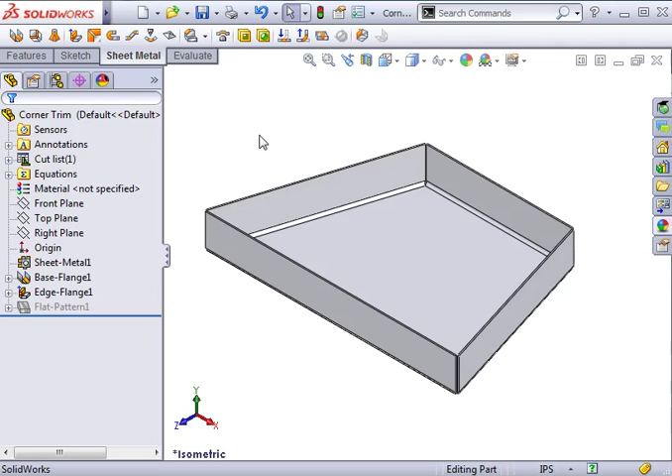Another tool you should be aware of when working with the flat pattern of a sheet metal part is the corner trim feature, which allows you to add relief and break any sharp edges. Corner trim can be launched from the sheet metal toolbar or from the Insert Sheet Metal drop-down menu. Right now, the command is grayed out.

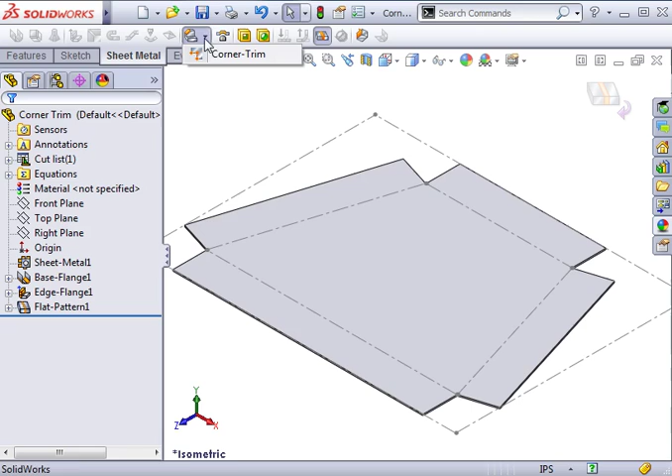The reason for this is that the new feature will be dependent on the flat pattern feature, meaning it will only be active in the flattened state. I'll go ahead and flatten the part. As soon as I do, the corner trim feature becomes available. I'll click on it, and the corner trim property manager will appear.

To get started, I can click on each edge that I wish to add relief to. Or I can use the Collect All Corners button to have SOLIDWORKS select all of them for me. Using the relief pull-down, I can set it to use square or bend waist, or I can leave it as circular. Whatever option I decide, I'll also be able to adjust the size using this area, or by using the ratio to thickness option.

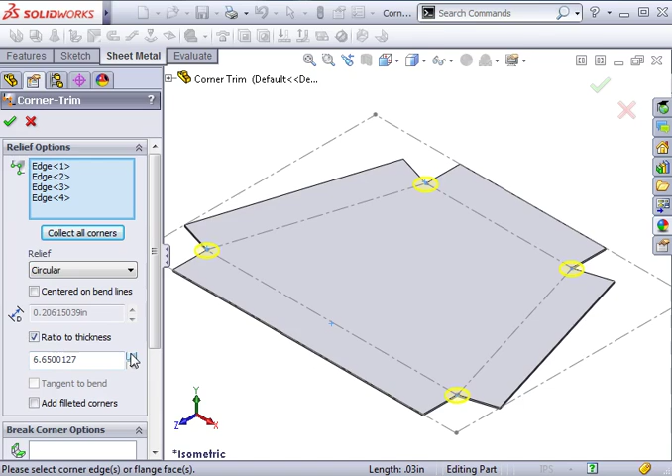When using the circular or square type, I can use the Centered on Bend Lines option to have SOLIDWORKS center the relief cuts relative to the bend lines. If I use the square type with the Centered on Bend Lines option, I also have the Tangent to Bend option, which automatically sizes the cut so that it's tangent to the bend lines. I can add fillets to the corners of the reliefs by checking this option and adjusting the radius.

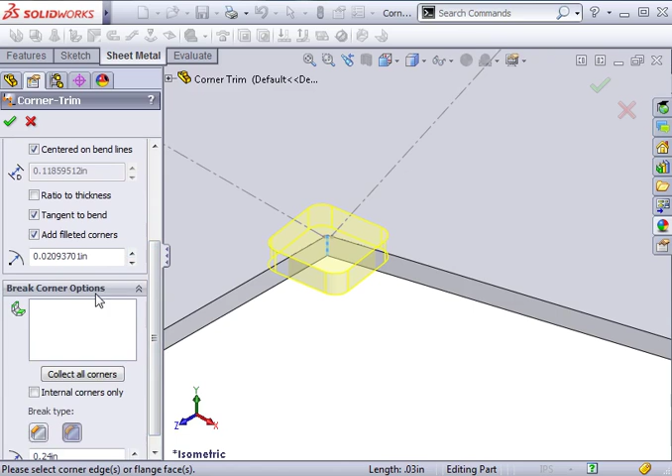The other section in the Property Manager I can adjust is the Break Corner options. This option allows you to remove material from external edges and add material to internal edges. To break all of the sharp edges, I'll click on the face of the sheet metal, and SOLIDWORKS will break every sharp edge that's touching the face. Notice the Break option does not override the edges that were added in the Relief Options section.

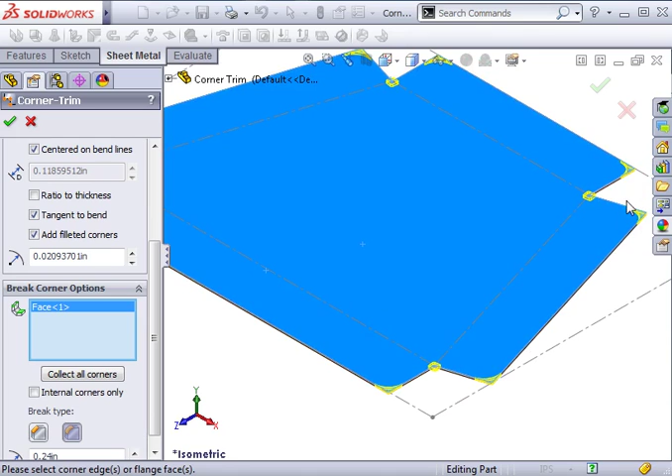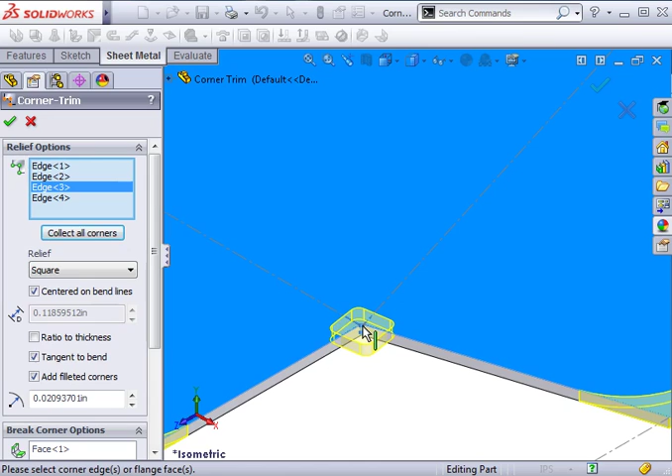If I wanted to break one of these edges instead of adding relief, I must remove it from the Relief Options section by right-clicking on it in the Property Manager and choosing Delete, or by clicking on it again in the Graphics window. You can see by the preview that SOLIDWORKS is adding a chamfered break to the edges, and I can adjust the size of the chamfer or change this to fillet and adjust the radius.

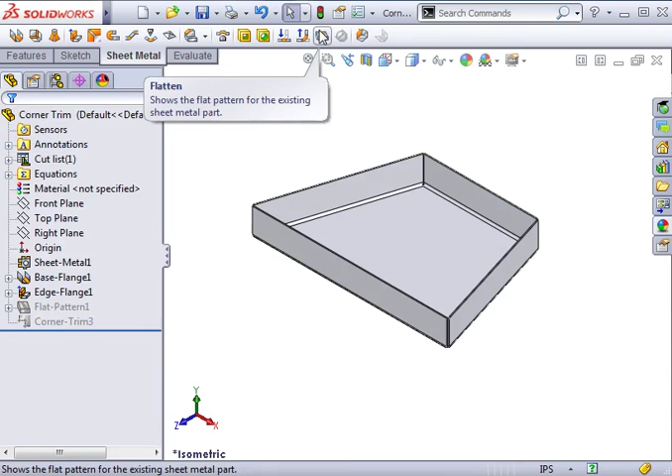At this point, I'll go ahead and click OK to finish the corner trim feature. It's important to note that all of the settings we specified in this corner trim feature are for the flattened state of the part only. They don't affect the part in its folded state. To make changes to the corner trim feature, make sure the part is in its flattened state. Otherwise, the corner trim feature will be suppressed.